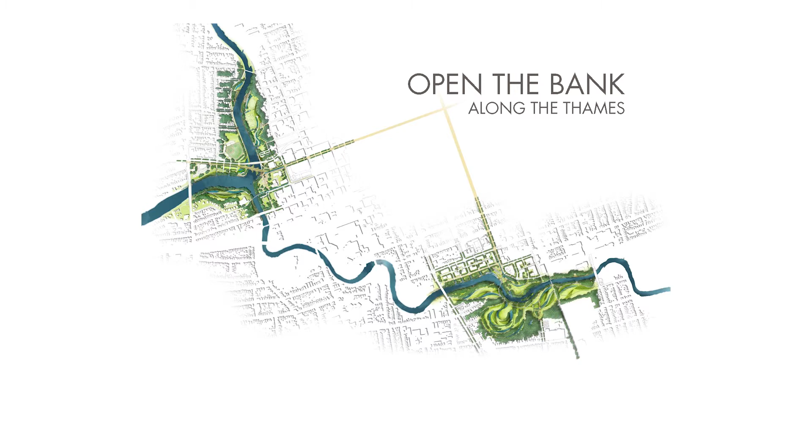We're not from here, so we took more than one trip to begin to learn more about this place. It's the people, it's about the river, the people, and the place. During our various site visits, we experienced the robust riverfront park network and the Thames Valley Parkway, and grew to understand this project is about reconnecting as much as it is about re-envisioning.

So this is a scene of London, and one thing to really point out is you have an incredible resource already. It's wonderfully pastoral, it's a wonderful green corridor, and it's really about working with what you have and thinking about what is the soul of London and how can it differentiate itself as a unique place.

So it's really about fostering new connections between London's heritage, natural, cultural, human - that's what is needed to aspire to greatness and breathe new and sustained life into a river and its people. Our vision does this by opening the bank along the Thames.

So we have a series of goals to go through with you. We mentioned the existing green network of parks and trails. Now let's consider -

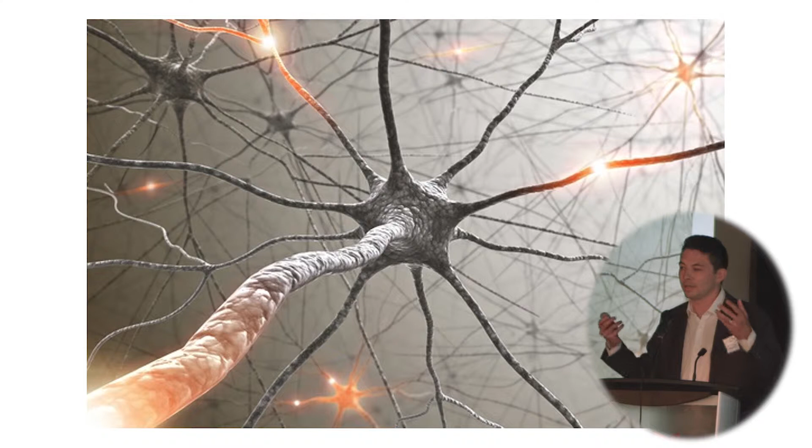it's really about the connections between not only the river but also the city network. And so we think about the grid, the network of streets, the ability to reach out and begin to connect the city to the river in ways that we haven't been able to realize here. And that is extending the grid - so we talk about this idea of the gray and green infrastructures.

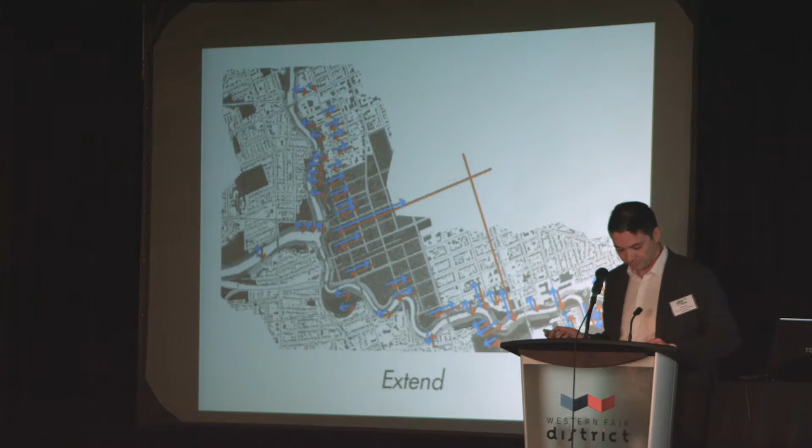In this light, the gray and green infrastructures must work together to extend the grid - the green grid outward into the city, and the gray grid back down the banks of the Thames.

And it's very much like lungs. For over 30 years, the Upper Thames River Conservation Authority has been carrying out its very important work of keeping people and property safe from major flooding events within the river corridor. This work has created a healthy riparian zone and a blank slate which we intend to use to let the river breathe and to create new places for recreation and discovery.

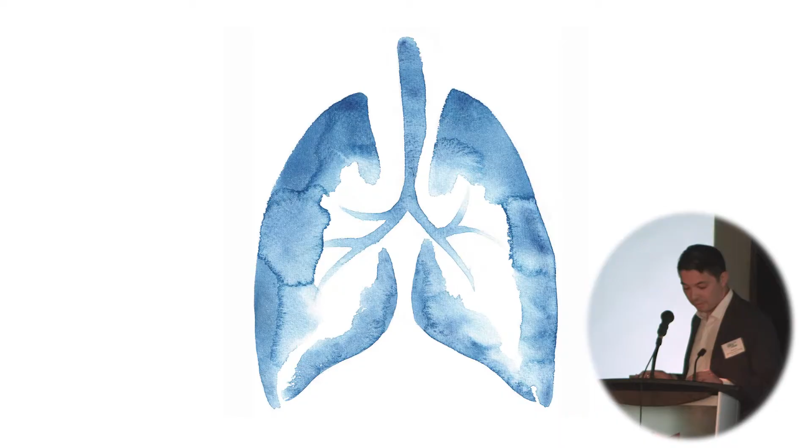So it is like a pair of healthy lungs. Their functionality can only be realized if they are free to expand and contract.

Letting the Thames breathe while creating new pockets of amenities for its people is the second of the two goals our concept aims to achieve.

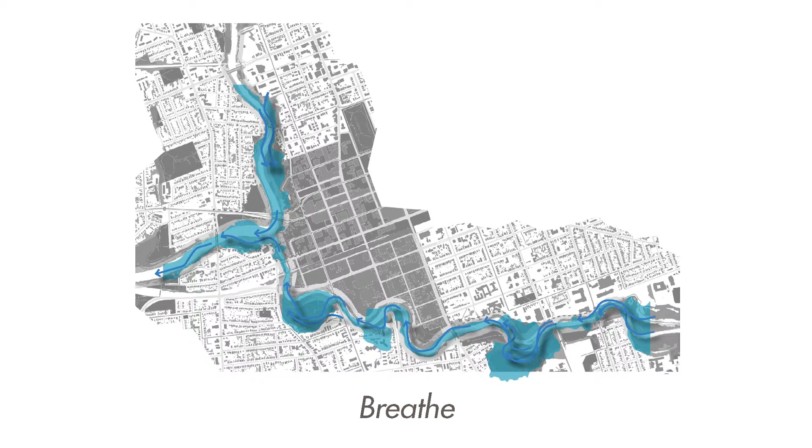In terms of strategies, we looked at a series of sections to begin to illustrate the concept of what we have before you. Before it was the Thames, this river was known by the First Peoples as the Askunasipi, or the Antlered River.

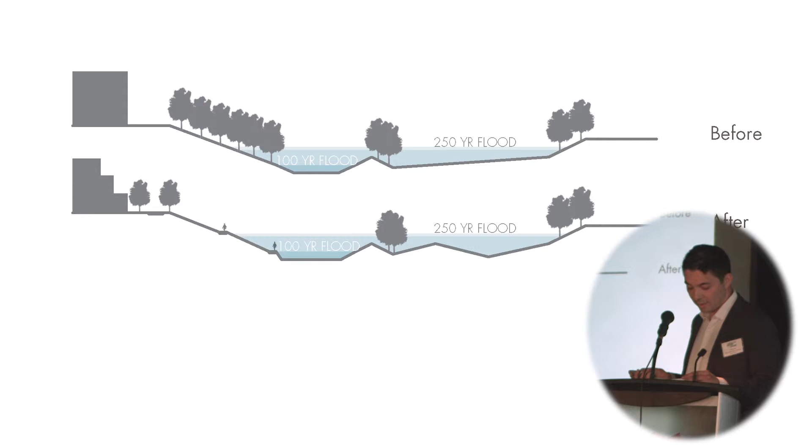Our first strategy was to open the bank to create a series of inlets at strategic points along the river to help extend the green grid into the city and the gray grid back to the river. Like the points of antlers, these inlets help to build these necessary physical connections.

And to help the river breathe, we propose a simple grading exercise to begin to transform the floodplain into a connected series of oxbow wetlands and modest ridges to help manage swell flows, treat stormwater runoff from the city, and create vantage points and meanders for a secondary trail network.

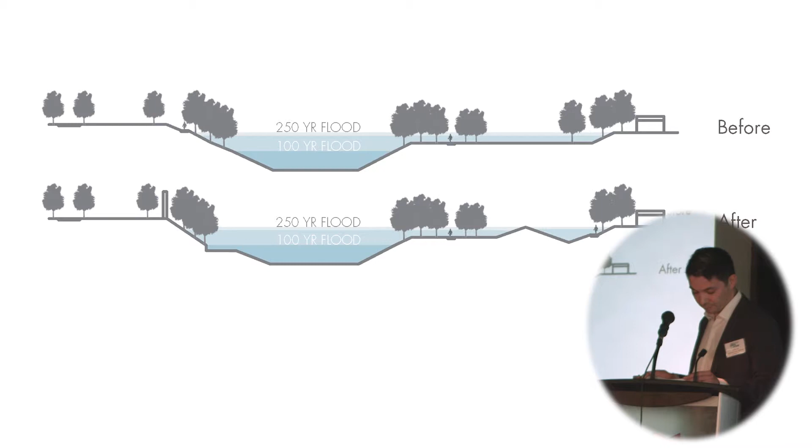And so what we began to think about is, in terms of transects along the river's edge, how this idea of the antlered river could work. And so it is so much about bringing the river to the city in many different forms.

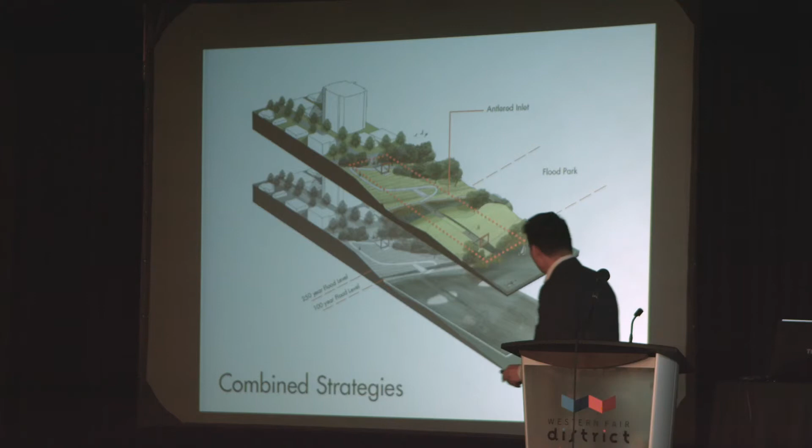You can see here the idea of creating slips in this location to facilitate marine access, both for boats, for urban ecology. We'll get into that in a second.

And also the idea of these oxbow wetlands, being able to sort of do some cutting and filling and sculpting the foreshore of the land, of the park space, to create these areas that could not only facilitate human experience in more meaningful ways, but also provide habitat creation as well.

And you can begin to see in the lower slide how the flood conditions at the 100-year and the 250-year flood levels can begin to be quite transformative in how we begin to experience the site.

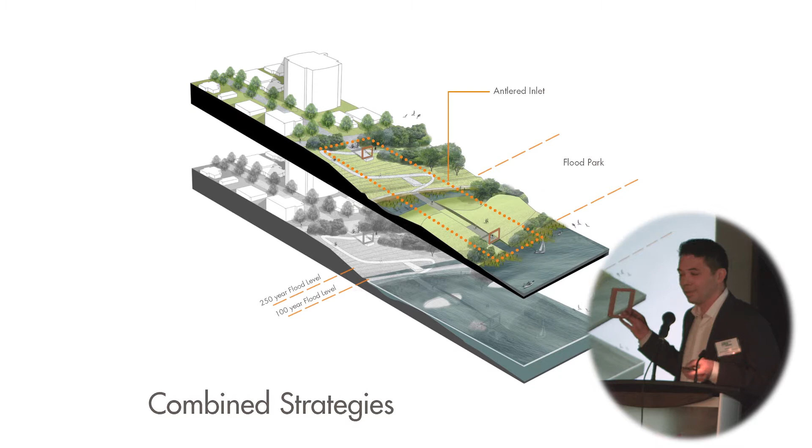What this diagram also shows is the idea of extending the street grid to the water, and the idea of creating a series of frames that we'll talk about soon. But the idea of being able to frame the view of the river and frame the experience of the river becomes a very important consideration in this.

So really, to summarize, it's about opening the bank by extending the grid and letting the river breathe with antlered inlets and flood parks.

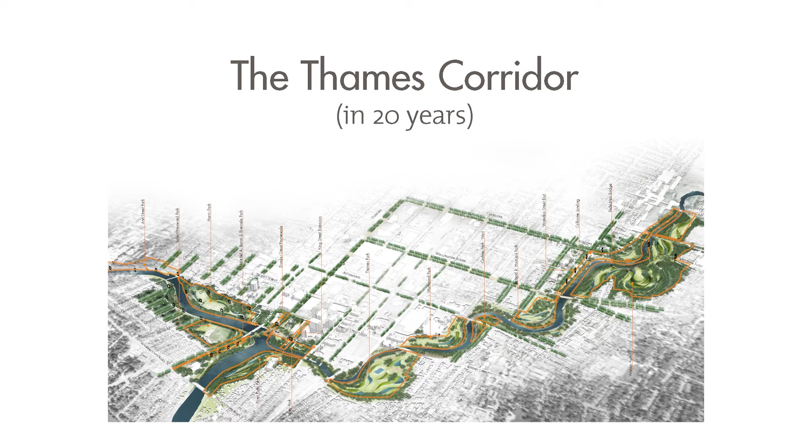So this plan illustrates a 20-year vision for the entire corridor. And we begin to think about how we can work with the river, letting it breathe, and working with that morphology of that meandering floodplain in ways that we can begin to kind of look at our existing park resources here and sculpt them to allow that river to change its course over time.

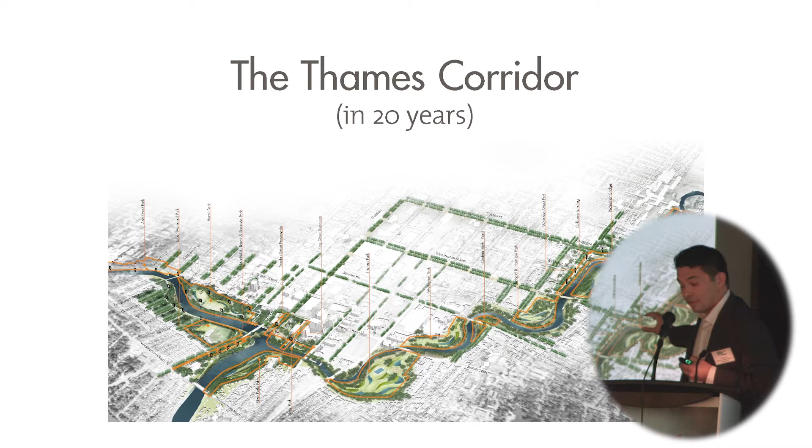When it floods, certain landforms are revealed or concealed. And it's about bringing not only people back to the river, but bringing sort of the ecological processes that have been ignored back into full fruition.

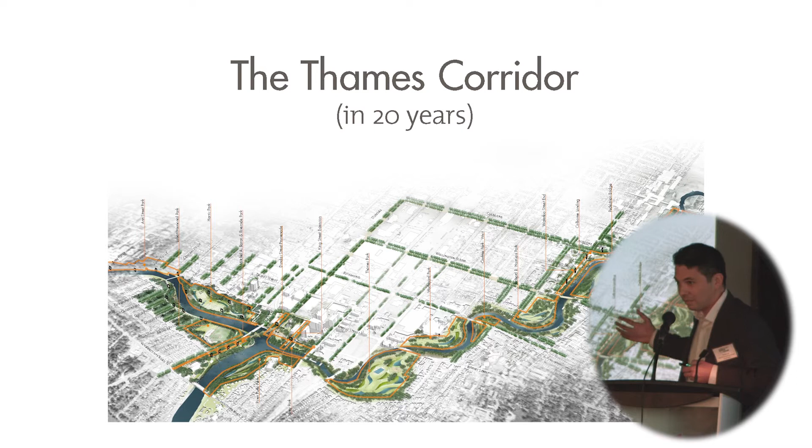And so I won't get into the details of the places, but as you can see here, I think what this begins to convey at this scale is kind of the revealing of that morphology of the river through the existing park network.

So we'll get into sort of the focus area of the forks. And this plan blow-up shows sort of the 20-year vision for the Forks study site. And you can see Harris Park.

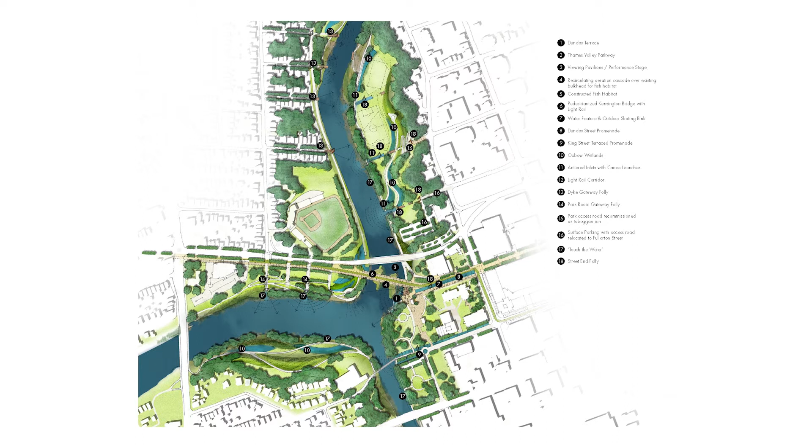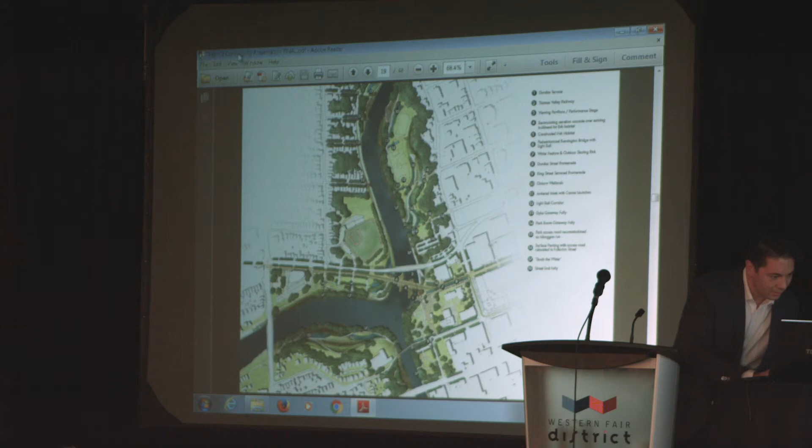What we begin to look at is how the park itself begins to manifest that notion of the meandering river.

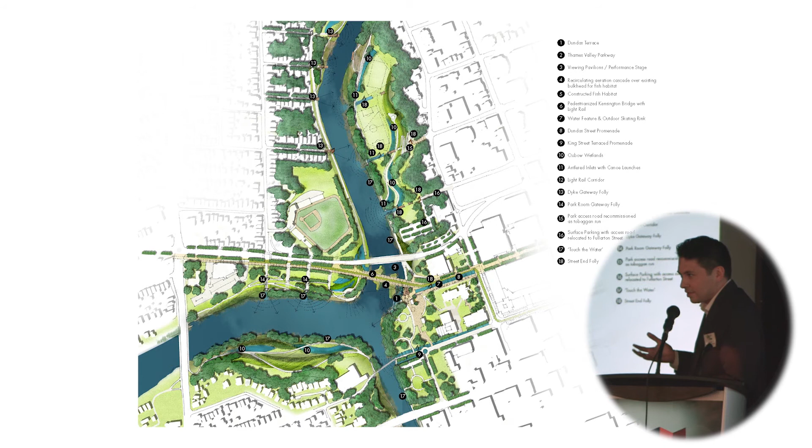But also, when we begin to look at the focus site, which is sort of the Dundas Street corridor, we wanted to build off of sort of the previous thinking, the downtown planning that's been in place for over the last months and years, and begin to think about, well, how can we work with this framework?

And as you can see in this image, we looked at Kensington Street Bridge, working with the assumption that it would be a pedestrian corridor, possibly handling light rail, and thinking about, well, if we do kind of extend Dundas down, what could it be as a place beyond that?

And so what we propose to do is that, south of or west of Ridout, we want to pedestrianize that space. We want to create an experience that focuses on bringing the river to the city vis-a-vis a series of rain gardens, water features, and also wanting to reveal the river by allowing people to terrace down and touch it.

So the Forks becomes a very pivotal point in that regard.

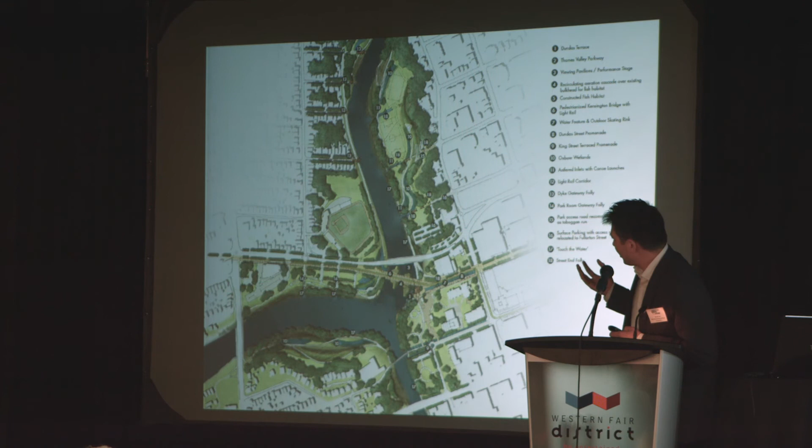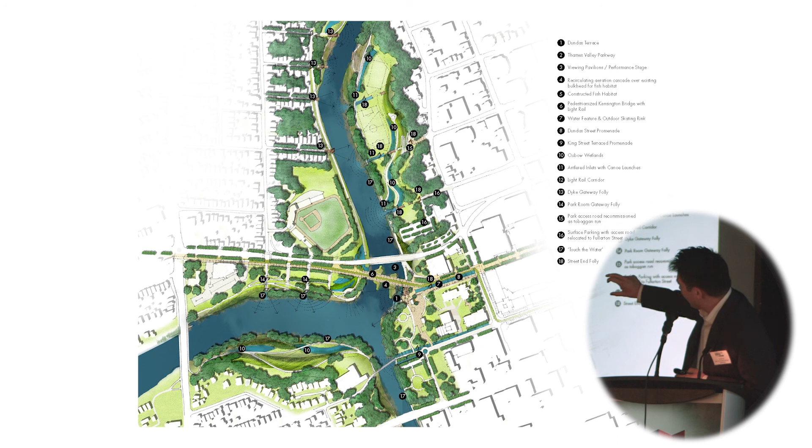We also begin to think about extending the grid both west of the river, the neighborhoods there, and on the east side, the fingers coming through into Harris Park, and understanding that there's a profile in which that touches down and links with these proposed blue slipways that we're allowing the river to sort of move in. The intent overall is to maintain the programming opportunity.